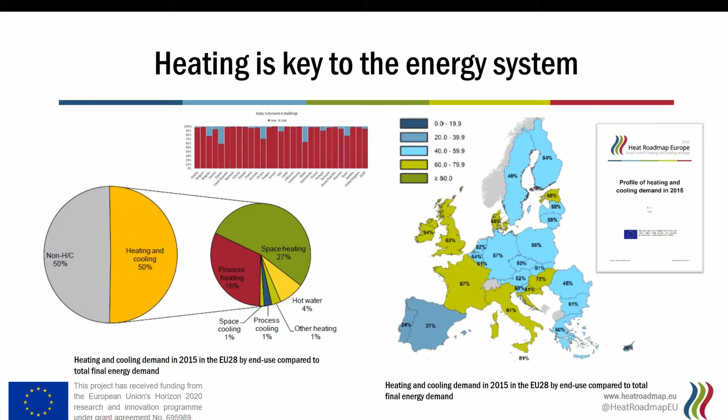other demands. And if we look across the countries, we can see that there are actually thermal demands, both heating and cooling, but the heating is really the main part of the thermal demand, and the heating demands are present in all the countries, not only in the northern countries. So even in Spain, Italy, and so on, there are some thermal heating demands.

The Heat Roadmap Europe project has, of course, generated a lot of results during the steps, and it has been found that the decarbonization of the European heating sector is possible, and also now in the current project we have found that the Paris Agreement can be met by already proven technologies. And it is technically possible and socioeconomically feasible to do this.

What is also one of the key outputs is that the heating is really a very local thing. It's very closely connected to the local conditions. So depending on the local settings, different solutions are feasible. So very briefly, we have found that energy renovations are really feasible almost everywhere, but in the urban areas, particularly district heating systems or district energy, also cooling systems are relevant to consider, whereas in the rural areas, heat pumps are the main technologies that we see as feasible for covering heat demands in the future.

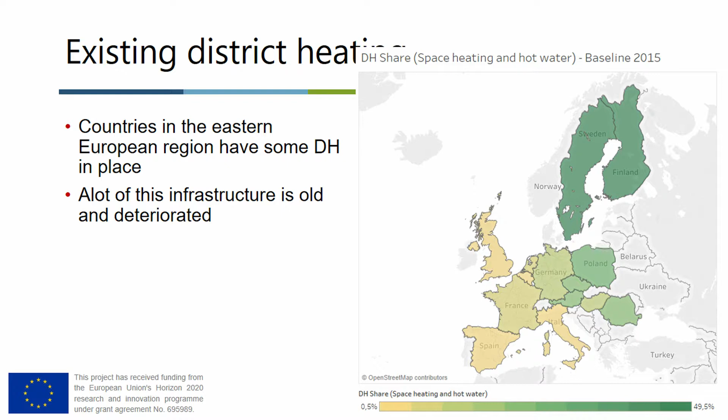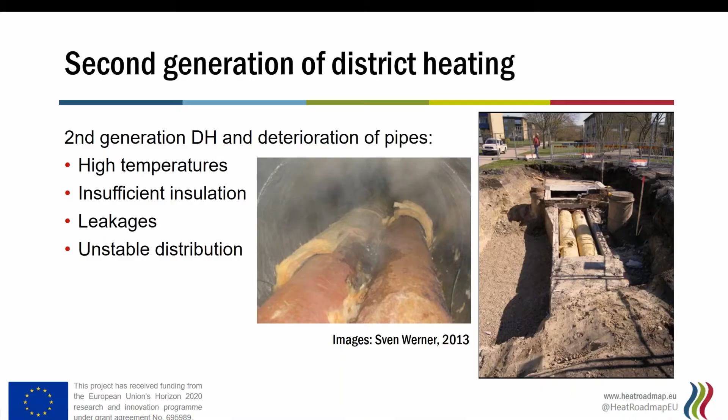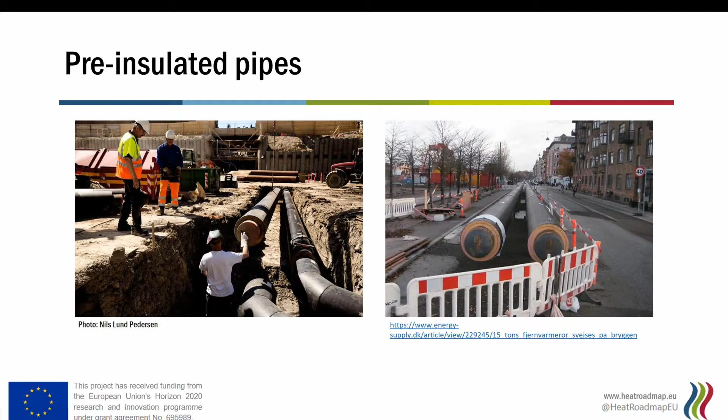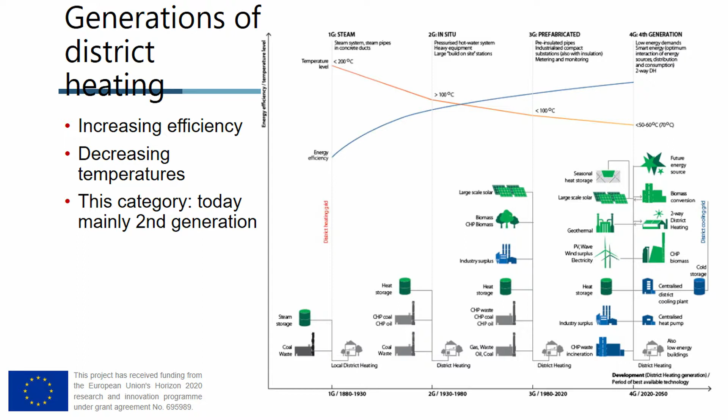So this is really what should be the aim for the coming development in these countries; at least our recommendation is to aim for fourth generation concepts and ideas when planning for the district heating supply. And now I'll give the word to Susana, who will tell you a bit about the methodology and some of the results here. Indeed, thank you very much.

As Rasmus said, before we talk about the results, it's useful to give a brief overview of the methodology. The aim of this webinar is not to make you experts on how exactly we did it, but it provides a bit of background so that you can understand where our results come from, particularly for these countries. So what we've done in Heat Roadmap Europe is combine several different approaches in order to make the scenarios and the roadmaps as we have.

The first element is that we've done a very in-depth profiling of the different types of heating and cooling demands that exist and that will exist in the future, using forecasts, so looking at where heat and cold will be used, at what kind of temperatures, and in what kind of ways it's looking towards being produced. Based on that, we've then also been able to look at the savings potential for delivered energy.

And that's been a big part in helping us show what kind of energy efficiency in the built environment and industrial processes is cost effective and viable, and bring that side of energy efficiency into the equation. The second thing we've looked at is the spatial part of heating. Heating is a bit special compared to other energy sectors and other parts of the energy system. Together with cooling, it's much more local than, for example, electricity and transport.

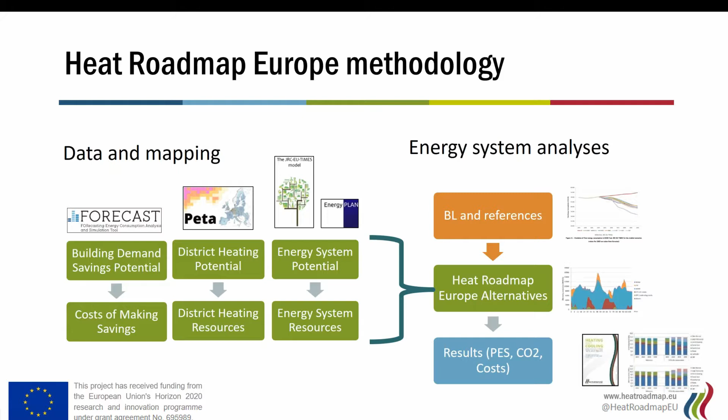That's done both through improvements in efficiency on the demand side, so in terms of both the building stock but also industrial processes, but also by making the delivery of that heat more efficient, typically through the provision of thermal networks and being able to recover different types of heat.

And that's an important thing to take into account, because when we want to decarbonize heating and cooling, we need to understand that electrification in and of itself is happening within the context of those other electrification processes.

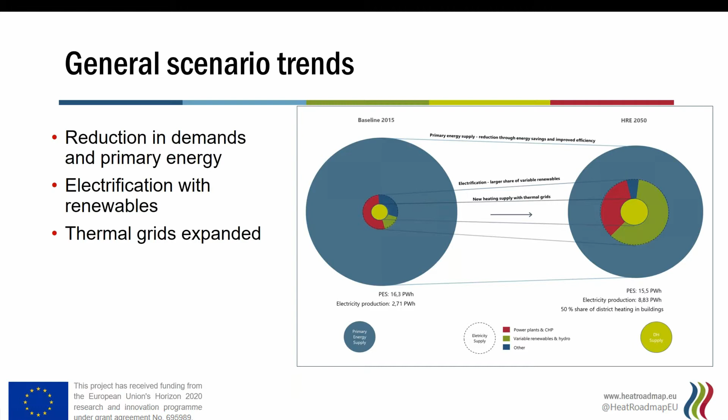And that is typically the result of both a building stock that has a very low standard for the specific heat demand, so typically an old building stock, and one of a lower quality. But at the same time, that also is an indication of, in some ways, the idea that the efficiency of buildings and the efficiency of industrial processes has only really been a focus in terms of policy and in terms of improvements for the last 30 years. On the one hand, that seems like a long time, but on the other hand, when we look at the lifetime of buildings and the lifetime of some of these process heating installations that exist, that is not a very long time. So it doesn't really compare to the lifetime of these things.

What that also means is that there is a lot of potential to move forward. So there's a lot of buildings that are due for renovation. There are a lot of industrial processes that are due for upgrading. So there are a lot of improvements to be made.

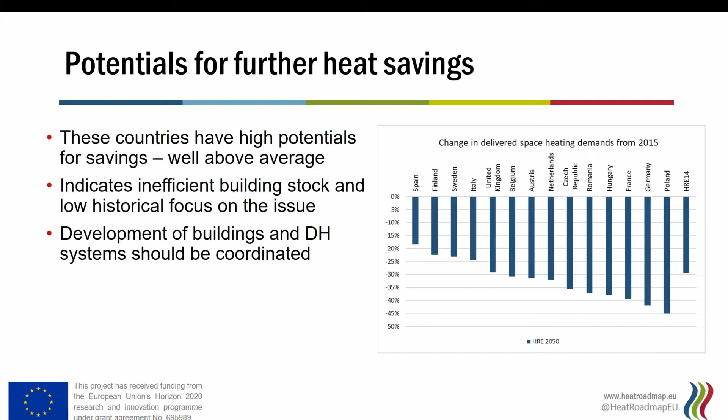One of the things that we'll talk a lot about is that in order to be able to make these heat savings most effectively, it is worth combining it with the savings on the district heating side and the renovations and the reconstructions on the district heating side. As I said, this is something we'll come back to, but it's important to note here as well that the change in delivered space heating demands can really have a synergistic effect with the change in the efficiency of the distribution systems.

But what we can see here is that if we look at the heat roadmap scenario, which is what we recommend in terms of really being able to bring deep decarbonization at an affordable level, is that the ambition should be higher, and that the efforts that are being put into the sector need to be increased. So we'll talk a little bit more about space heating, but just to point out here that process heating is not at all insignificant.

And it's an area where almost all the savings that are possible are cost effective, but it's very difficult to make savings. At the same time, it's also a very important sector because it's a strategic sector in terms of economic growth. But as we really address these space heating issues, you can see that the process heating becomes proportionally more interesting. And that's also then where excess heat becomes proportionally more interesting.

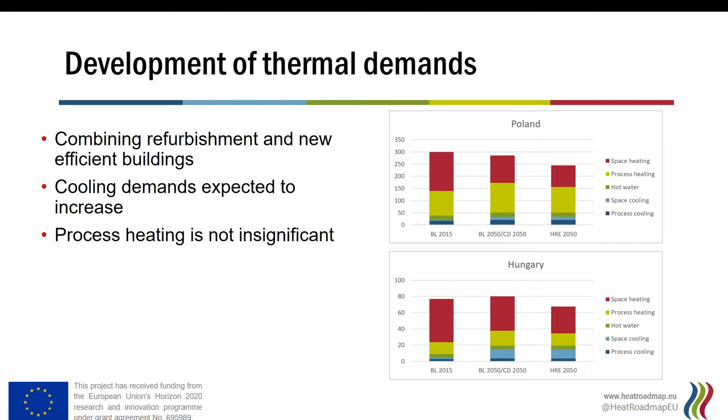What's quite interesting about the 4 countries that you see here is that we found really quite significantly different results than from the other 10 countries that we looked at. So since the scope of Heat Roadmap Europe is really to look at proven technologies and technologies that are being used today, we excluded from what we analyzed more experimental and more hypothetical kind of approaches and technologies and means of being able to achieve space heating demands.

But in almost none of the countries, this was an issue. So except for these 4 countries, we basically found that the cost of achieving higher levels of savings was higher than the benefit that you get out of it at the very high levels. So it wasn't necessarily a problem that we excluded these more experimental types of heat savings.

In the 4 countries that you see here, there is a potential that those technologies, which we didn't really consider, could be cost efficient, because the highest level of savings that we tested and the highest level of savings that we made were relevant for the final heat roadmap scenarios. So it may well be worth exploring those more experimental routes.

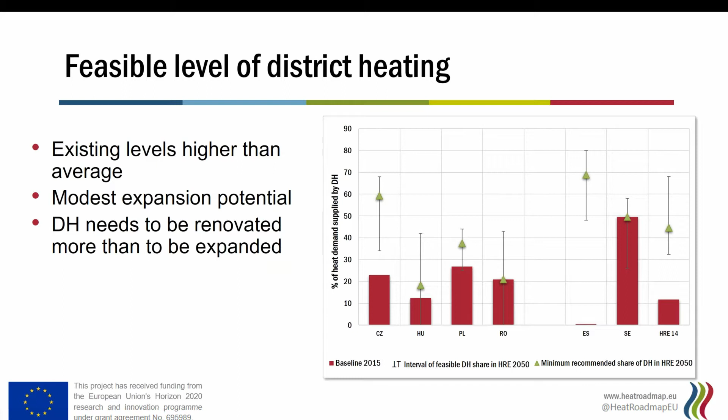So when we look at this level of what the share of district heating should be, which we'll talk about before we talk about what the district heating looks like, rather. The potential for district heating is much more driven by the kind of spatial typology of the country than necessarily something which has to do with the district heating itself or with the built environment itself.

So there are cities in which there is a fairly high potential, but outside of those cities, it becomes very difficult to be able to achieve levels of district heating. So that's the kind of background as to what the different levels for the district heating are, and what that means for the different types of expansions that come with it.

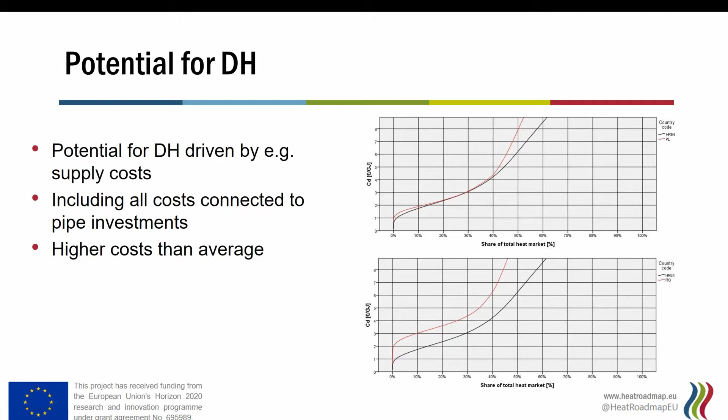When we look at what the district heating is being fueled by, so what the district heating production is, then that's where really one of the more radical changes come. We kind of go back to this line of looking at a 2nd generation district heating system versus a 3rd and a 4th generation district heating system. But when we talk about the district heating in the Heat Roadmap Europe scenarios, then we're really talking about something which is much more diverse and much more flexible than what exists today.

So when we compare to what happens today, which is on your left-hand side, then we're really looking at CHP plants and fuel boilers. When we look at what we're recommending in the Heat Roadmap Europe scenarios, then there's still a relatively high level of CHP. The difference is that these are much smaller and these are much more flexible. So they typically operate towards the electricity market, and the heat that's being used in the district heating systems is very much kind of a pure byproduct.

The other heat is typically supplied by heat pumps. These actually form a really nice synergistic effect with the CHPs in order to be able to interact with the electricity system. Because the CHPs run on the demands of the power sector, when the power plants are not required there, then it's very easy to use a lot of the renewable variable electricity for the heat pumps in an efficient way. But we're also looking at a lot more kind of industrial excess heat.

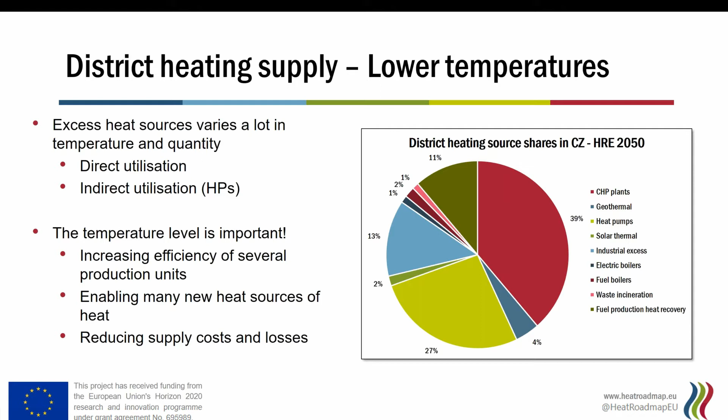What we've done here is really look at it at an aggregated and on a national level. But what would move forward from this is to start looking at that at a very local level. Of course, if you have an area where the demand in buildings is 120 degrees, then implementing these different technologies becomes very different. So the renovations that are recommended in the Heat Roadmap Europe scenario really need to complement the developments that are happening within this district heating sector, and vice versa. The developments that are happening here in the district heating sector need to be complemented by what's happening in the built environment. As you can see, there are very few slides left, so we're almost there.

The last point to make about this complementarity between the energy efficiency on the supply side and the energy efficiency on the demand side is that that also makes things a lot more complex. So when we start using a lot more of these diverse types of heating supply, that also means that the way in which we balance them and the way that we construct these markets becomes a lot more difficult. So there's the temporality of the heat production. There's also the way in which the initial investment requirements are covered.

So one of the things that we looked at in Heat Roadmap Europe was really about the investment costs that are required for this, and the different levels of capacity that are required within different system setups. And those are things where we really need the market's uptake and the policy to be able to support these kind of recommendations. When we're looking at these transitions that we're making, as we mentioned, we really only use technologies that are proven and that are already being currently used.

But it's also necessary to understand that an economy of scale can make all these things more cost effective and can bring better developments to a lot of these technologies that we're considering here today. We've been very conservative in the kind of learning rates that we've assumed and the ways that we've assumed technologies to change between now and 2050. But these things can change within a collaborative environment where a lot of research is being shared with each other. And that's also part of then the complexity of trying to bring together all these different types of technologies and different types of conversion rates.